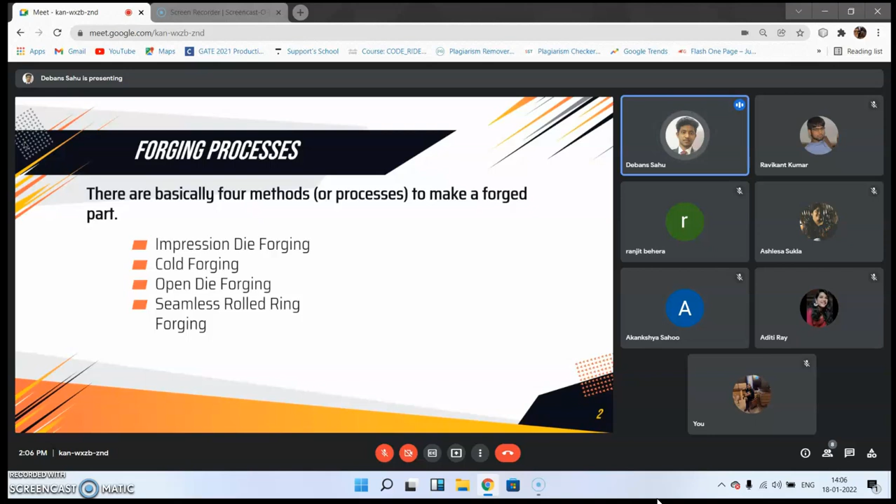The first one is impression die forging. Manufacturing processes are incredibly sophisticated, incorporating complex methods to produce components and finished goods that many of us take for granted. Impression die forging, also known as closed die forging, is one of many forging techniques, but it offers a wide range of applications and benefits.

What is impression die forging? As you may know, forging uses compressive force to shape billet metal into more complex forms. In simpler language, it is used to form complex shapes. In the case of impression die forging, two or more dies are used to shape a metal billet that's been heated to the proper temperature.

Depending on the component's design, forging may require one set of dies or a multi-stage process with many sets of dies. So how does it work? Here is a small video.

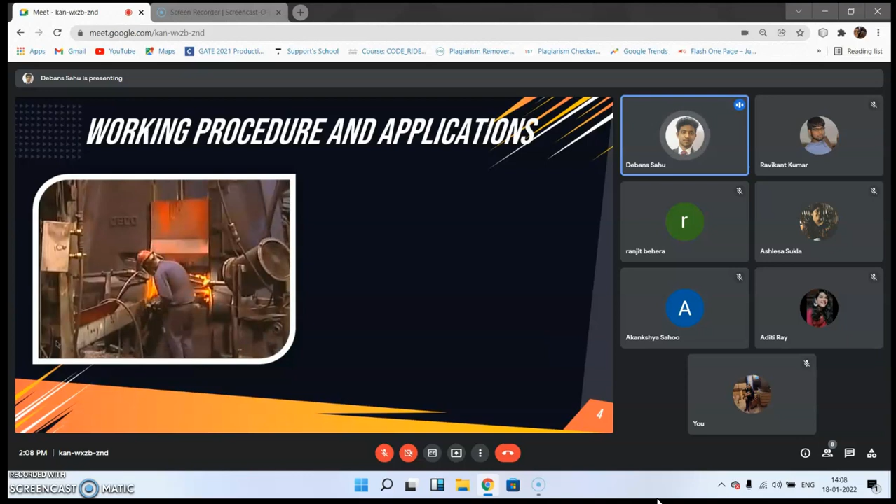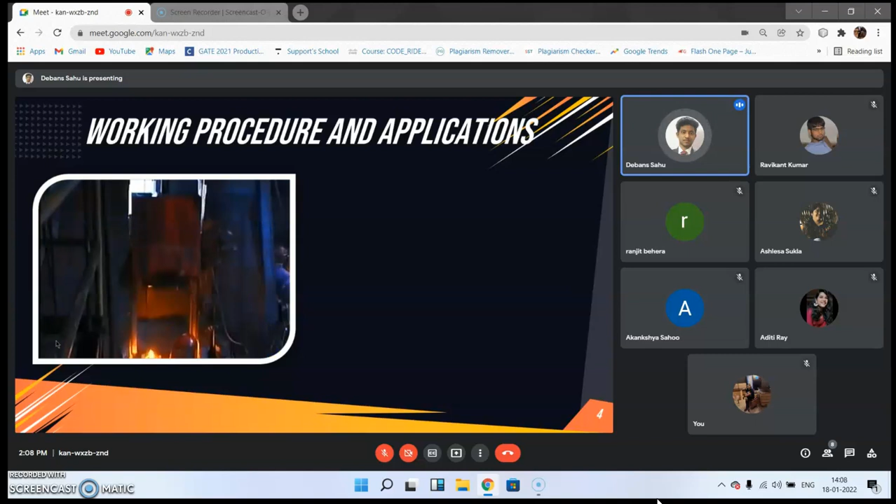Impression die forging, also known as closed die forging, is so called because each set of dies behaves like a pair of casting molds. This process uses a hammer along with manufacturing dies, typically connected to the anvil. When the hammer is dropped on the workpiece, the hot metal flows and occupies the die cavities. The hammer may only touch the workpiece for a few milliseconds at a time and may be rapidly dropped several times in a row. Here in the video, it is showing that.

Okay, so next to Ashlesa. Thank you, Deblina. Now here are some facts and benefits.

This forging method involves any leftover hot metal that's pushed out of the die cavities, called flash. Since it cools down more quickly than the metal inside the die, it blocks more hot metal from escaping and turning into more flash. This also ensures that the remaining hot metal fills up the die.

Once the forging process is complete, the flash is taken away and the finished product is left behind. Closed die forging is very effective for shaping aluminum, steel, titanium, and a wide range of metal alloys.

By enclosing the hot metal inside sets of dies, many kinds of three-dimensional shapes can be produced. This includes simple forms such as cubes, discs, and spheres, but it can also be applied to multi-section parts that incorporate thin delicate webs and long spindle shapes.

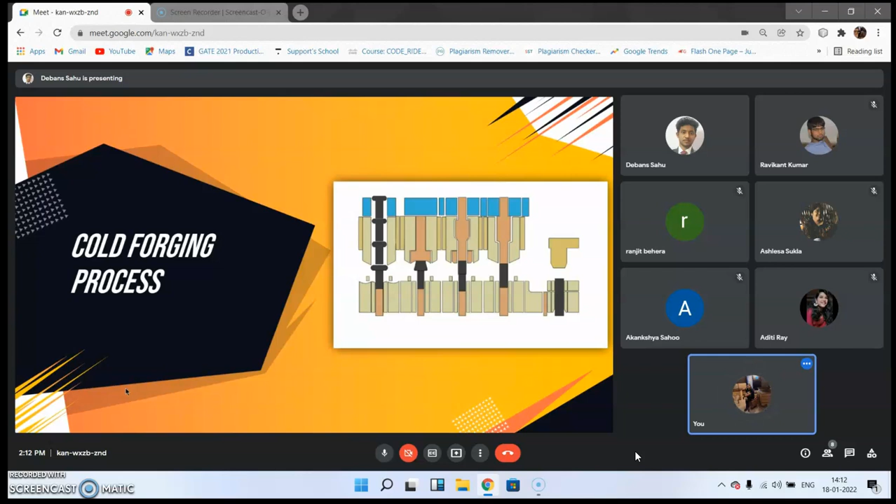Now we will show you an animation related to this, about how it works.

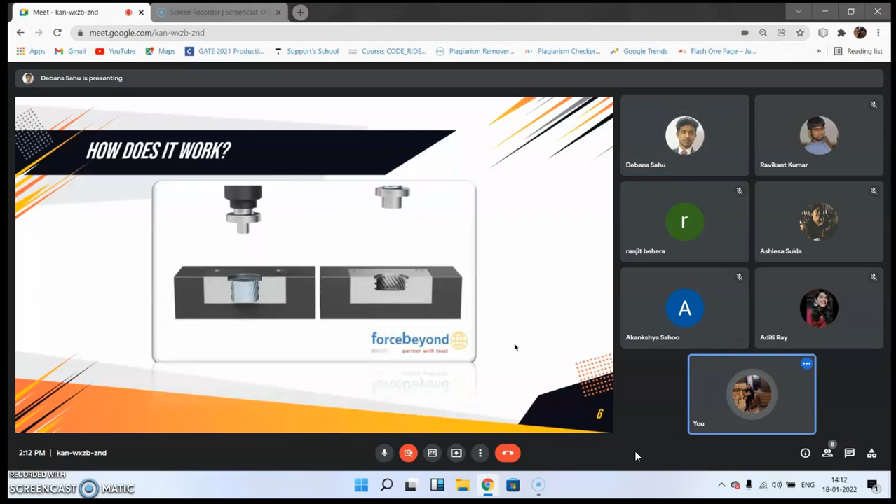First of all, the bar stock is cut and some lubricant is applied onto it. Then this stock is inserted into the die that has the shape of the final part. After that, the stroke is applied onto the stock, and we acquire the desired shape, and the final product is obtained.

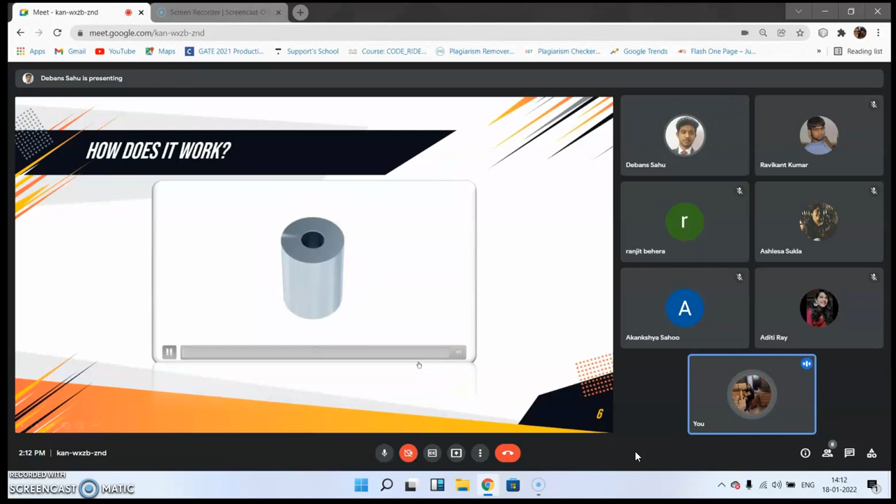Okay, thanks Deblina. Now coming to applications of cold forging, we'll get to know where cold forged parts are being used.

Second, military parts, which is the most important thing. Military has very strict stipulations regarding military hardware and chooses cold forging for the manufacturing of shell casings, bullets, and other military hardware. Parts have very high reliability and performance during times of crisis. The low tolerance and strength of parts makes them perfect for military weapons.

And the last one, hand tools and hardware. Examples are connectors such as nails, bolts, rivets, and nuts, which have been produced by cold forging for many years. The low tolerance and excellent dimensional accuracy is why producers of hand tools prefer cold forging over other methods such as machining. Thank you.

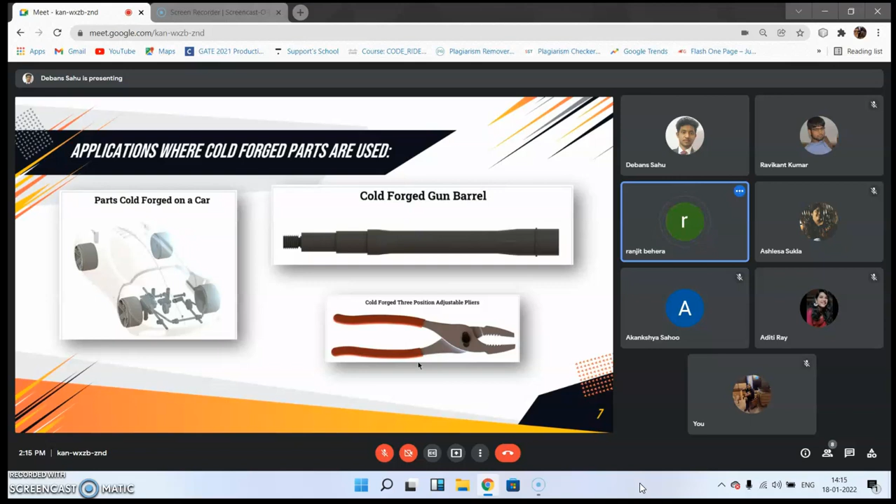So now we are going to discuss open die forging. Open die forging is also known as Smith forging. In open die forging, a hammer strikes and deforms the workpiece, which is placed on a stationary anvil. Open die forging gets its name from the fact that the dies do not enclose the workpiece, allowing it to flow except where contacted by the dies.

Therefore, the operator needs to orient and position the workpiece to get the desired shape. The dies are usually flat in shape, but some have special shaped surfaces for specialized operations. It allows rough and finishing shaping of metal, most commonly steel and steel alloys.

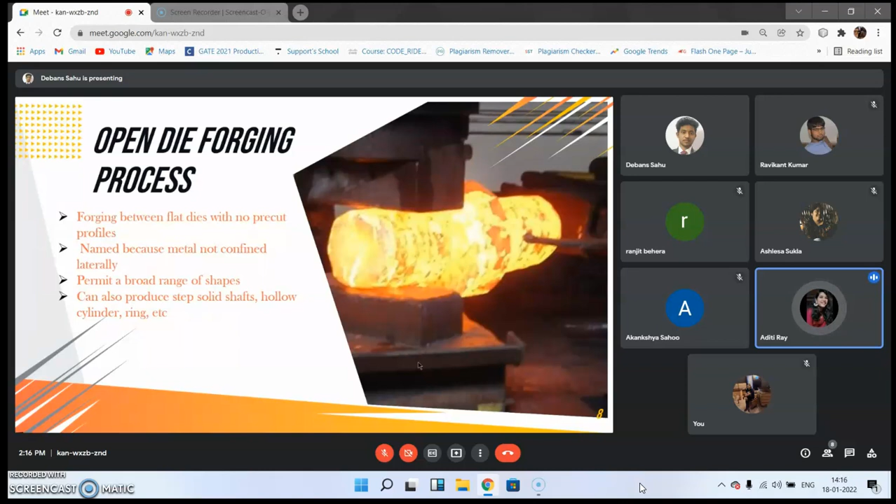It requires a die that is open on the side, allowing the workpiece to move freely in a lateral direction when struck. This design also allows forging of very large workpieces, in some cases weighing many tons and having great length and width. Some open die forges can accommodate pieces weighing as much as 150 American tons, which is 136 metric tons, and 80 or more feet, which is 24.4 meters in length.

Practically all forgeable ferrous and non-ferrous alloys can be open die forged, including some exotic materials like age hardening super alloys and corrosion resistant refractory alloys. Over to Akanksha.

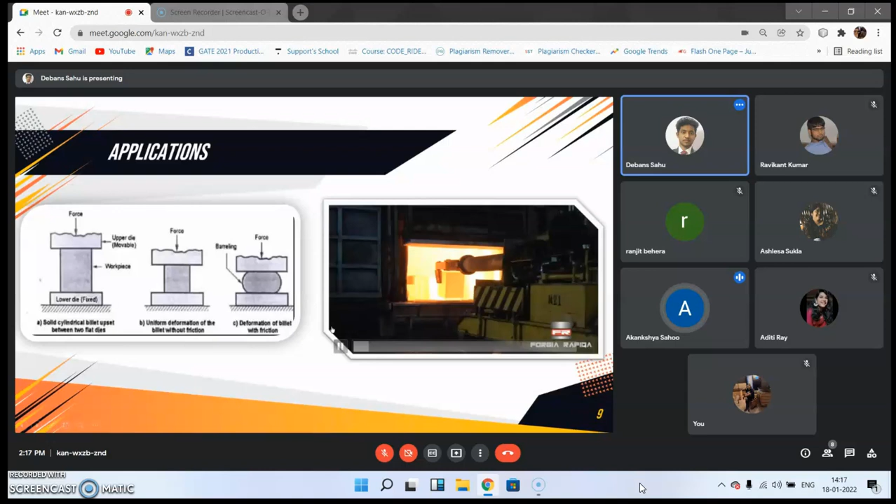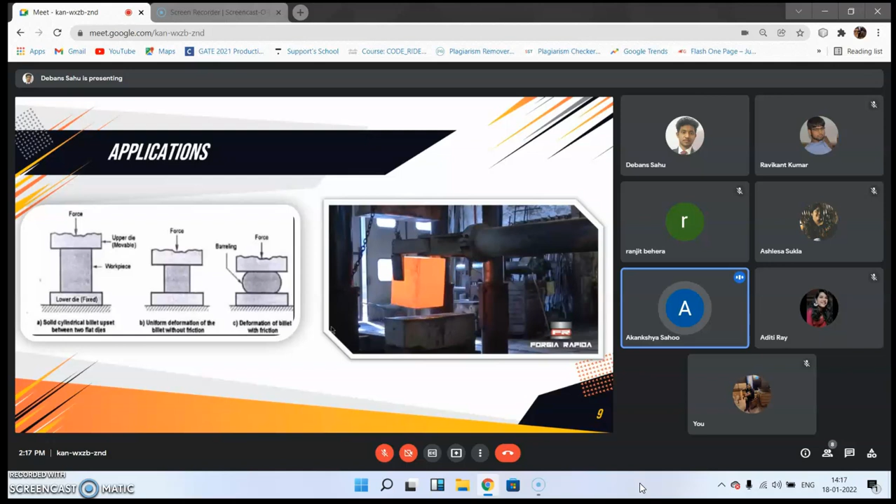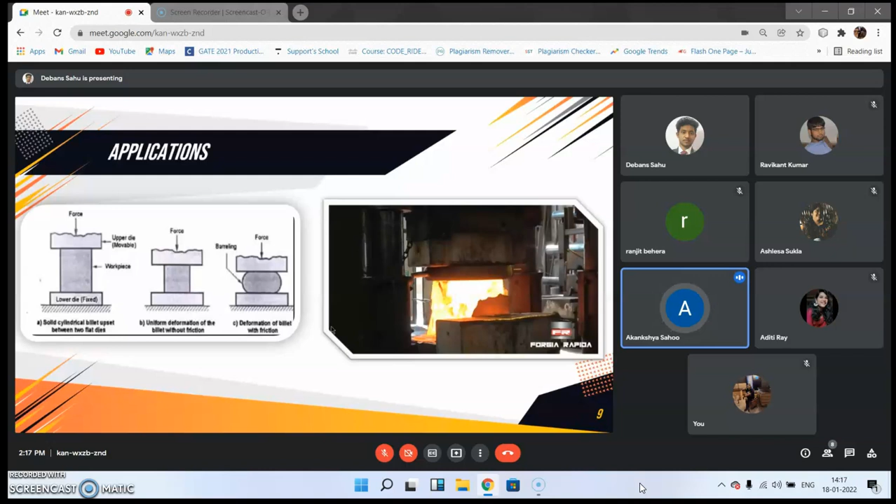Thank you, Aditi. Now, open die shape capabilities are indeed wide in latitude. In addition to round, square, rectangular, hexagonal bars, and other basic shapes, the open die process can produce step shafts and solid shafts, whose diameter increases or decreases at multiple locations along the longitudinal axis.

Then hollow cylindrical shapes, usually with length much greater than diameter. Length, wall thickness, inner diameter, and outer diameter can be varied as needed. Then ring-like parts can resemble washers or approach hollow cylinders in shape, depending on the height to wall thickness ratio.

Similar to successive forging operations in a sequence of dies, multiple open die forging operations can be combined to produce a required shape. Forging an integral gear blank and hub, for example, may entail multiple drawing or solid forging operations, then upsetting. Similarly, blanks for rings may be prepared by upsetting an ingot, then piercing the center prior to forging the ring. That's the small piece of information about open die forging.

Okay, so can you tell me some more advantages of open die forging? Yes, one advantage of open die forging is that it produces forgings with unique physical properties, because the metal's physical properties are enhanced and improved during the forging process. This means the density is increased as the grain structure is refined, both contributing to the metal's overall strength. Thank you.

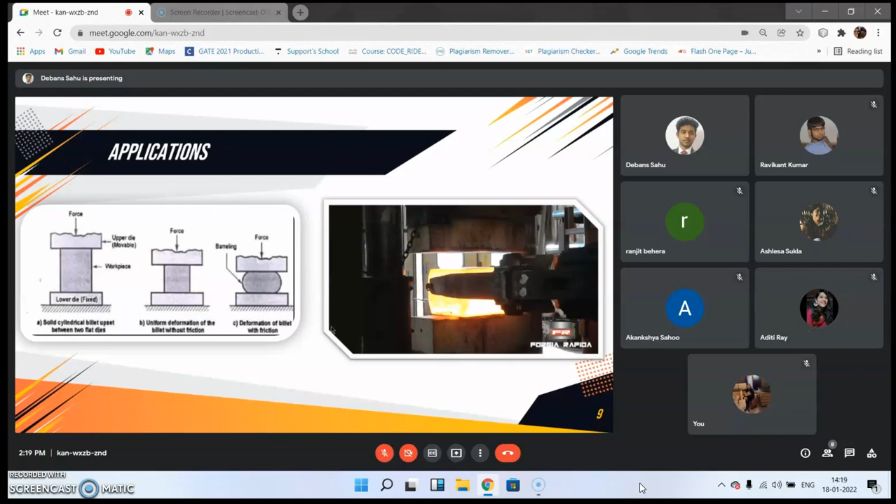So next up is seamless rolled ring forging. I want to present a small video to explain it.

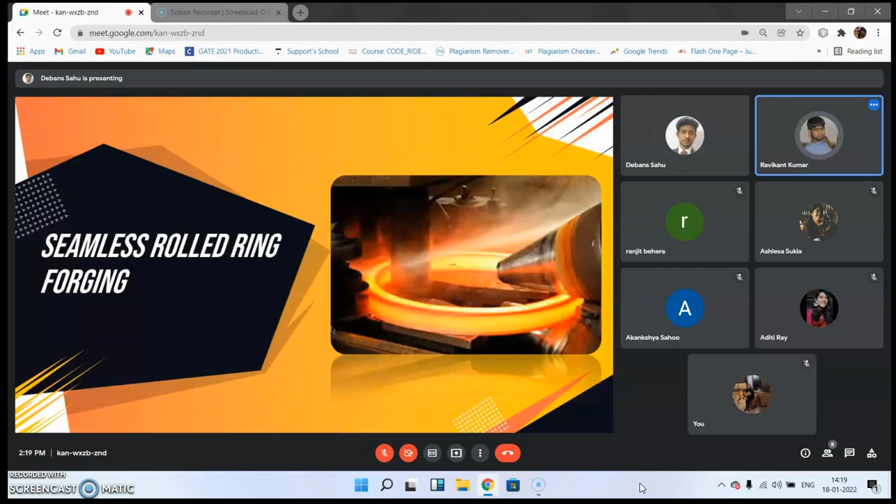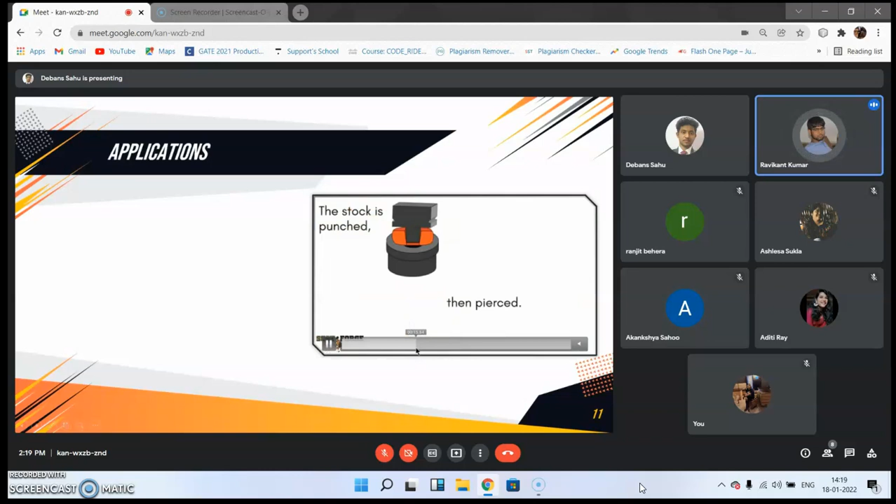Here, starting stock is cut to size, then moved onto the press. Then the stock is upset on the press. The stock is punched, then pierced. The complete preform is ready for rolling on the ring mill. The axial rolls control the height, while the idle roll applies pressure to the preform. The pressure decreases wall thickness while height and diameter increase until the right size is achieved. Thank you.

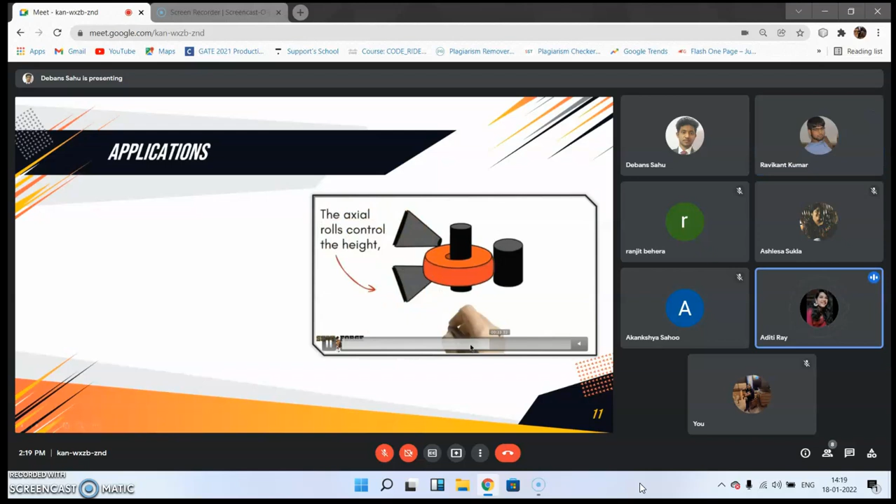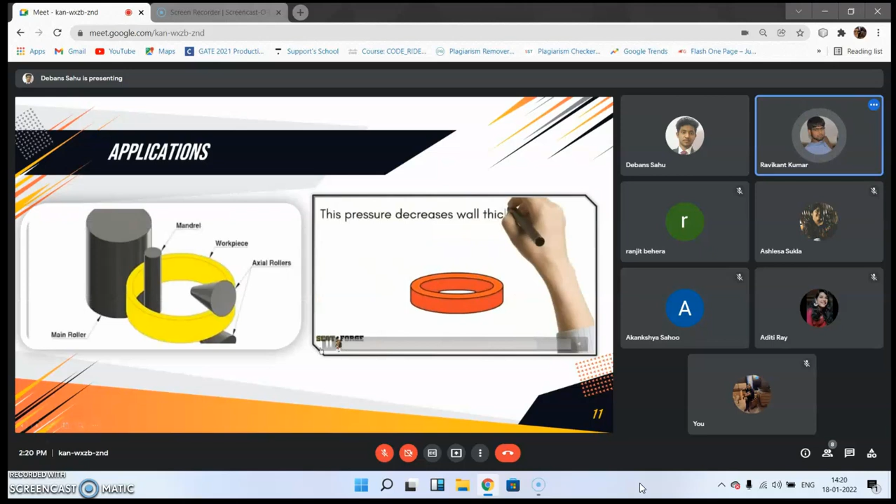So I would like to ask Ravikant: what is the core forging difference? At Scot Forge, we know the importance of getting your parts on time as expected. However, for customers new to the process of forging, ordering a forging that will meet all the specifications for the end use application may be challenging.